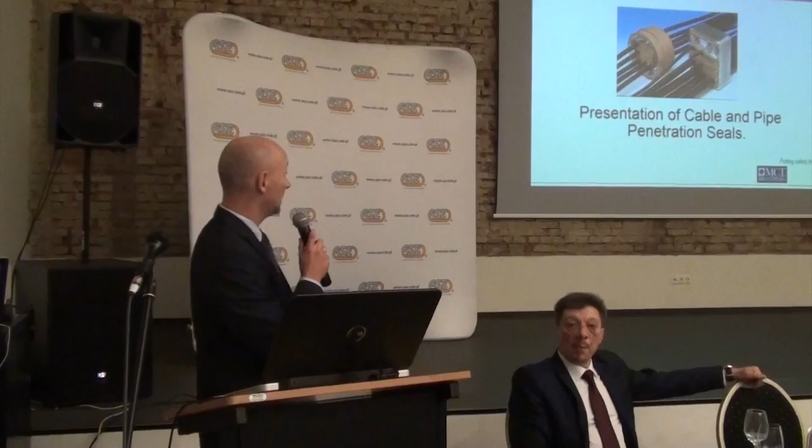My presentation is divided into three different groups of products. The first group is modular cable transit systems, MCT Brattberg. The second one will be marine external lighting from Tranberg company from Norway. And the third part is special GRP enclosures for very sensitive field instrumentation to protect against the harsh environment. So let's start from the beginning.

MCT Brattberg, the presentation of cable and pipe penetration seals. I would like to show you what the system is, how it works, etc. A few sentences about the history. This nice man is Nils Brattberg, the founder of the system. He was a naval architect in Karlskrona naval shipyard in Sweden. And he saw the need to seal the cables and pipes on the ships, and he found the special system.

After he died, the company changed its name from Likab to MCT Brattberg, after him. The company is based in Lyckeby near Karlskrona in Sweden. Founded in 1759, it's more than 250 years old. In the beginning, they produced copper hammers, but from 1860 they manufactured nails. 60 years ago, they received a royal charter to manufacture cable transit systems. Now it is a world leader in cable penetration systems.

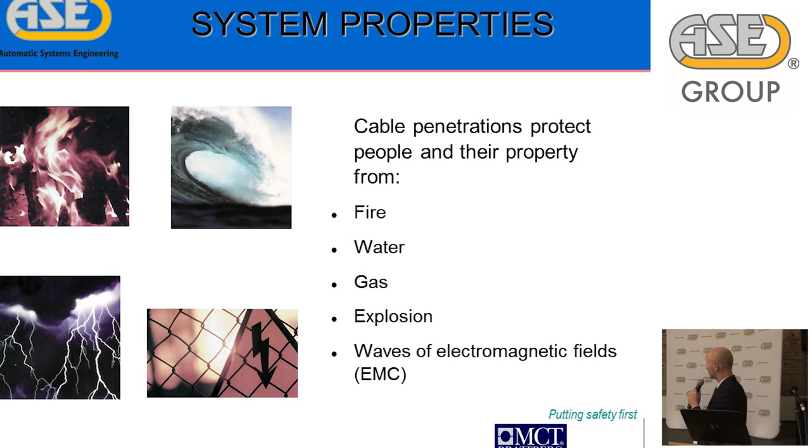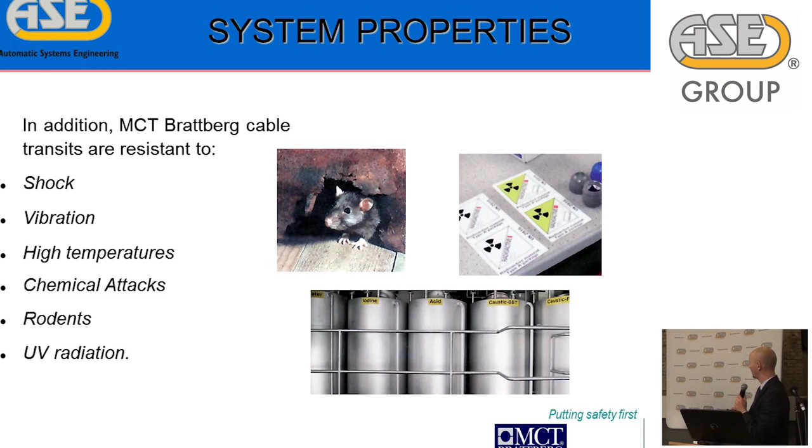Additionally, our customers need our system because they want to protect the cable transit against shock, vibration, high temperatures, chemical attacks, rodents, UV radiation. It's also a funny story, because our system has special approvals that it is not so tasty for rats. This is very important especially in harbor and also land applications, big plants where rodents are present. Of course, today's seminar is devoted to Ex zones, so our system also fulfills these requirements: ATEX for zone 1 for gas and dust.

How the cable transit works. It's a very simple idea. We have to install the frame into the structure. We could weld it to the structure, we can bolt it. It doesn't matter where we are. It could be a brick wall like this, or it could be the bulkhead in the vessel. We have a special solution for each place, and we pull the cable through the openings, open the frame, adjust the block to the cable, insert the block, and fill free spaces.

We fill them with special blocks, meaning zero blocks or spare blocks, and we put special stay plates between the rows of the modules to anchor the rubber into the frame, put the compression system on top and tighten the screw, and we have all the properties like fire, water and gas tightness up to 5 bars thanks to these systems.

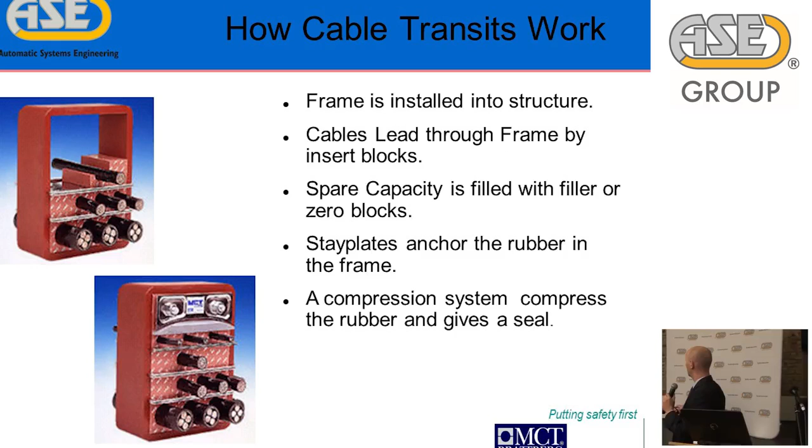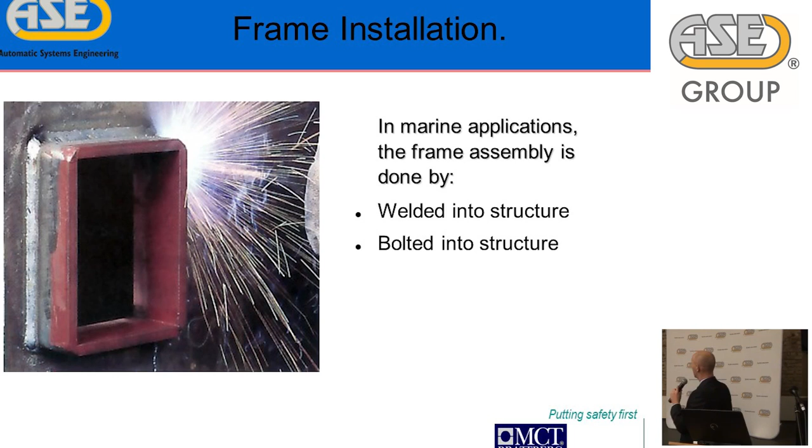So in the beginning I would like to show you some frames for marine applications, because the system started in marine 60 years ago, and I will start from this segment. The standard frame is very easy. It's a marine frame welded or bolted to the structure. The name is RGS. This is the standard frame, on the left side. We use it in places where welding is allowed.

The second frame is RGSO, the open-ended version. It's used when we have cables already put through the cable transit, so we have to use the open version of the frame. And the third picture shows round corner frames. These are special frames for welding in place, to reduce the risk of cracking.

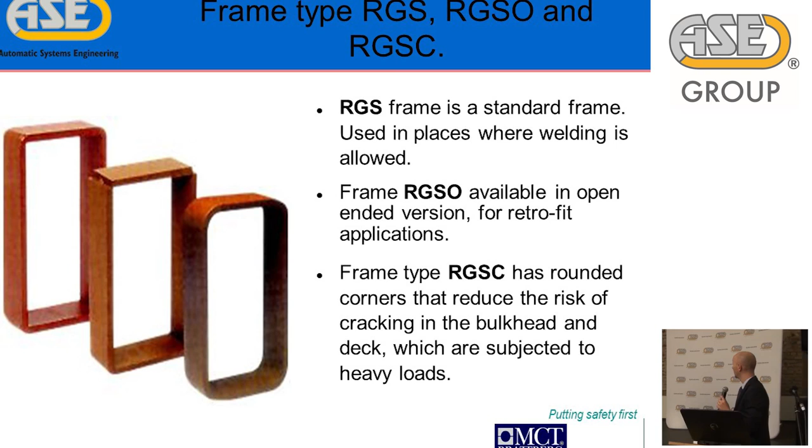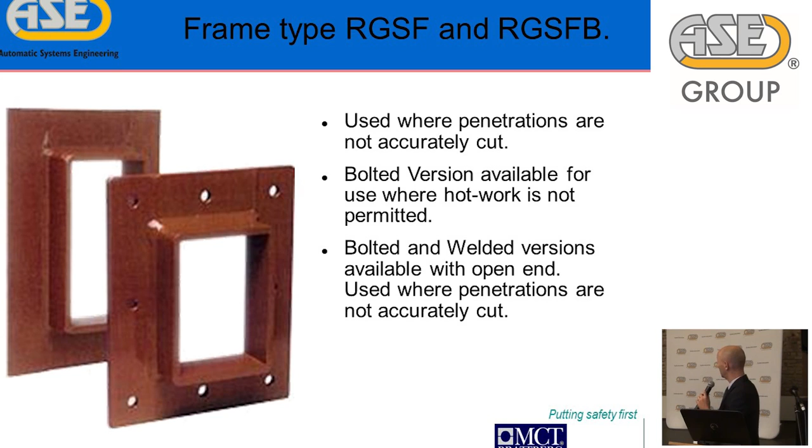Next frames are the RGSF and RGSFB. F means the flange, and B is bolted, flange with the bolted. So it's very easy to know the short name. We use this frame when we have not accurately cut the openings in the bulkhead on the ships. Of course, there's also a bolted version where there is no possibility to weld. Both of these frames could be in an open version also.

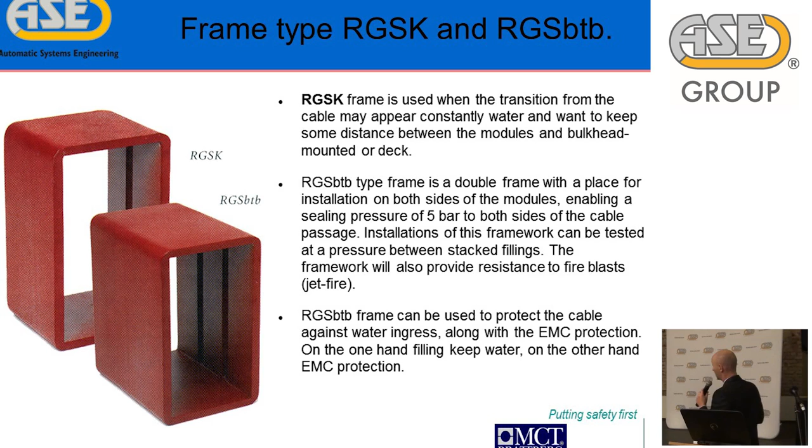The second picture is a special frame, RGSbtb. It is mostly used in offshore applications, and we can use it on both sides. For example, on the left side we can use the standard blocks for fire class applications, but on this side we can use EMC protection. So, an excellent application frame.

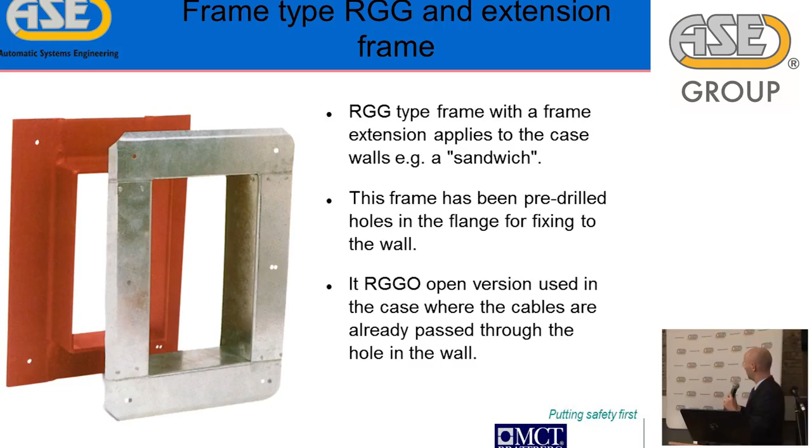The next frame is RGG with an extension frame, especially for a container. It means sandwich. It looks like a sandwich: a very thin sheet of steel, some insulation inside, and the last part is also a sheet of steel. We use this kind of frame. It has pre-drilled holes, a flange, and we can put it on the container, for example.

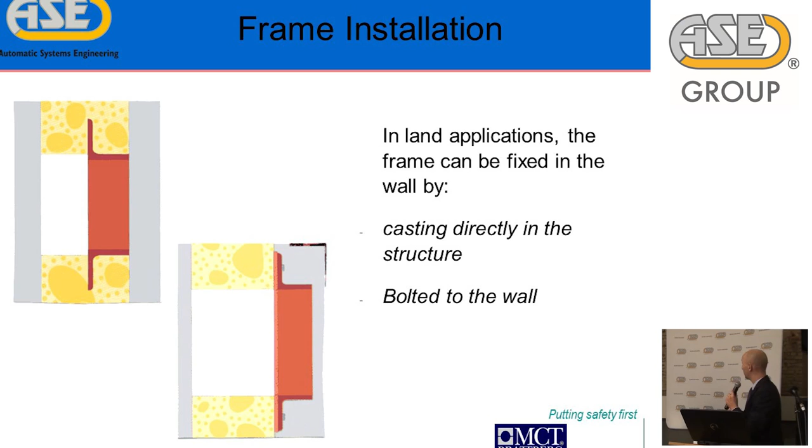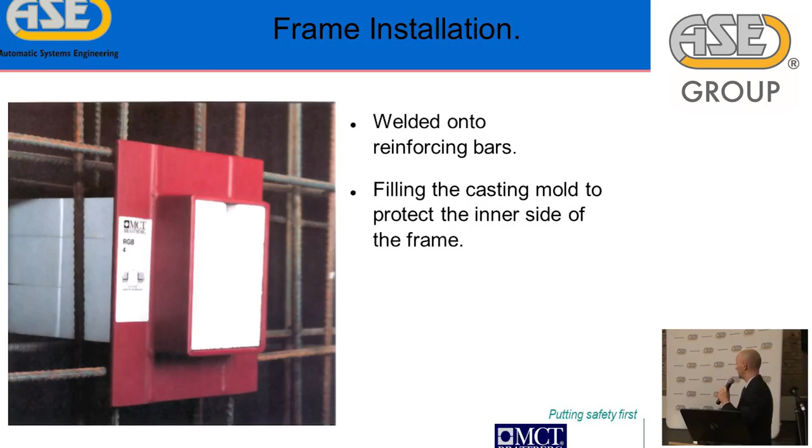How to install the frame in the building area: of course we can cast it directly in the structure or bolt it to the wall. So very easy. Or weld it onto reinforcing bars. But we have to remember that if we weld, you have to fill a special casting mold inside the frame, because there could be some dirt inside after the welding. This is installation in the sandwich construction, as mentioned before. It's very easy, and we use an additional seal between the flange of the frame and the wall.

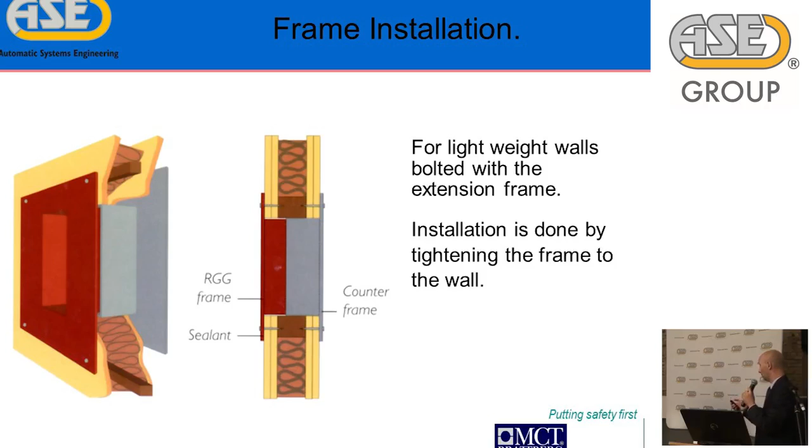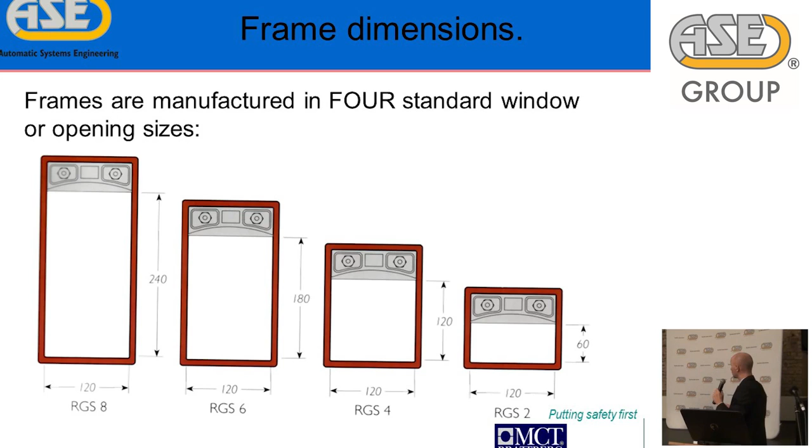Our system was the first in the world, and Niels Brattberg found 4 standard sizes. From the right side, it's RGS 2, 4, 6, and 8. The width is the same, 120 millimeters inside, but there is a difference in the height. Of course, it doesn't matter how many cables there are. It could be 300 different types of cables. We can adapt the frames to the quantity of the cables and their external diameter.

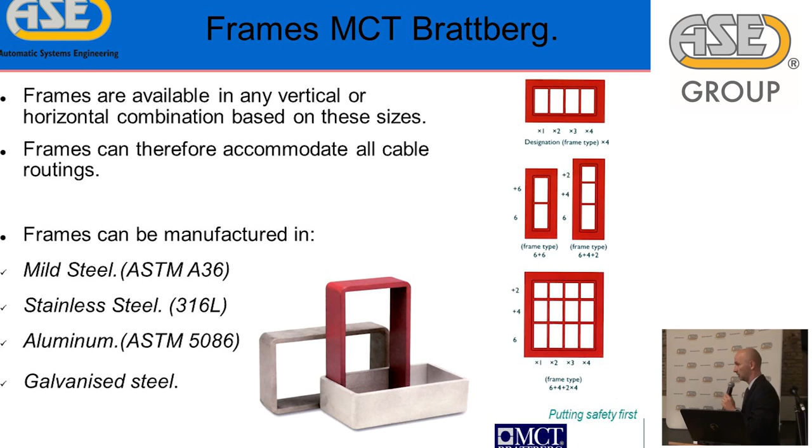Of course, it depends on your application. We can use frames made from stainless steel, mild steel, aluminium, or galvanized. Galvanized steel is not recommended for welding because it will be burned. Most of the production of the frames is located in Karlskrona in Sweden and robotically welded. So we have perfect quality, excellent delivery times, and each frame is tested not only for dimensions but also the welding points.

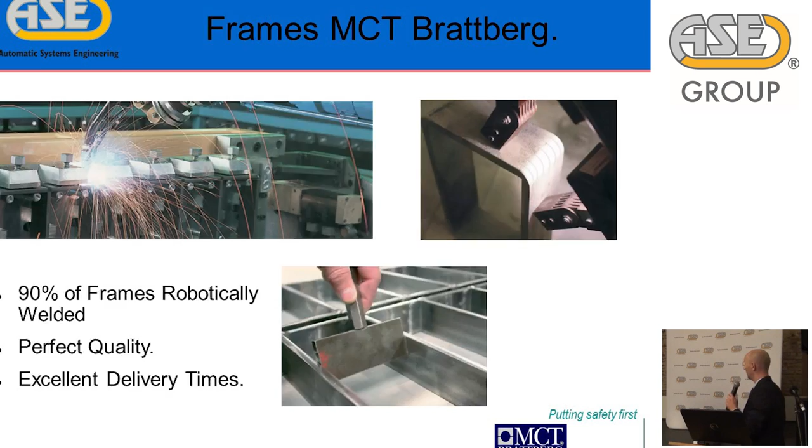Types of blocks, modules. In the system we have a few standard blocks. First of all, and for us the most interesting, we recommend using the standard blocks like this. I will show you later in the next slide how it looks. Flexible blocks, AddBlocks, U-blocks, and spare blocks for free space.

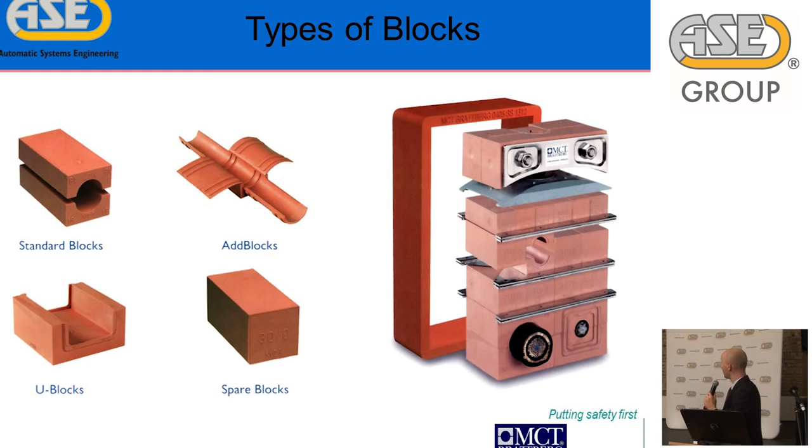Standard blocks. Standard blocks consist of 2 halves, suitable for outer diameters from 3.5 to 101.5 millimeters. It's important that all the rubber products are pre-lubricated. It means you don't have to think about special lubrication. Zero blocks, meaning spare blocks, we use when we want some free space in the frame for future additional cables.

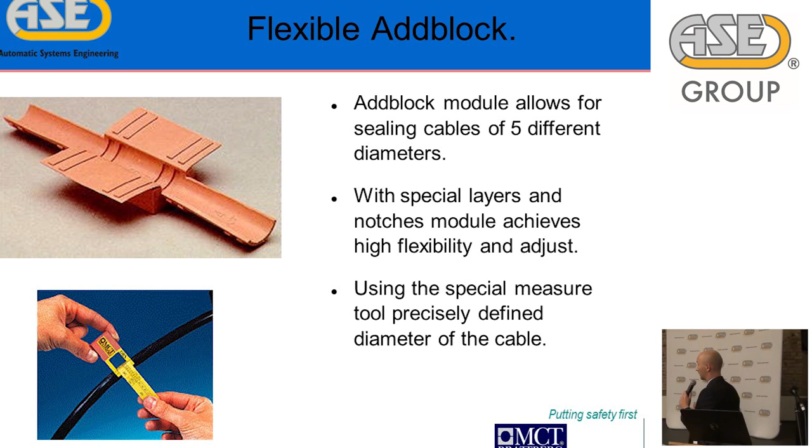Flexible AddBlocks. We call them service blocks. They are very good if you have no idea what type of cables will be in your application, on ships or in the field. So we can take these flexible blocks. It has a 5 millimeter tolerance. You don't bother what cables will come. This block has special external layers like this, and you can adjust after measuring the cable. You choose the proper layers. These layers have different widths, and there is also information on the blocks about which external cable diameters to use.

So how it works: after measuring the cable, you select the appropriate layers. So you put them inside the blocks. The rest of the layers is separated from the blocks, and the same way you do with the other half of the blocks.

Some features about the rubbers, about the modules. Modules are rubber components made by injection molding. It's a halogen-free material, low rate of smoke during a fire. This is the most important thing on a ship: to protect the people not against the fire, but against the smoke. The smoke kills first, then the fire. The rubber parts are pre-greased, pre-lubricated, so it's a very, very clean job to do with our system, and very simple and fast.

AddBlocks enable adjustment to the cable diameter directly during installation. This is, as you mentioned, a service block. It means that if you travel 500 kilometers to some application and you have no idea what cables there are, you can take the flexible block. But if you have ships in the shipyard, located here, it's much easier, much faster and cheaper to use the standard blocks.

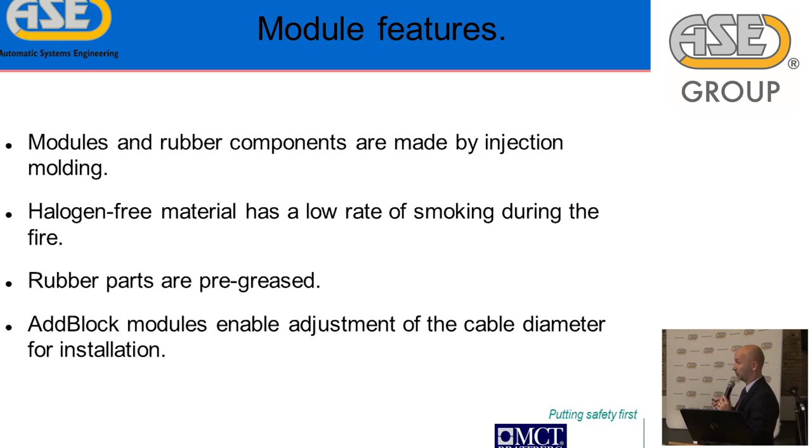Of course, between all the rows of the blocks we use stay plates, which help us to anchor the blocks into the frame, and also protect against an explosion and high pressure.

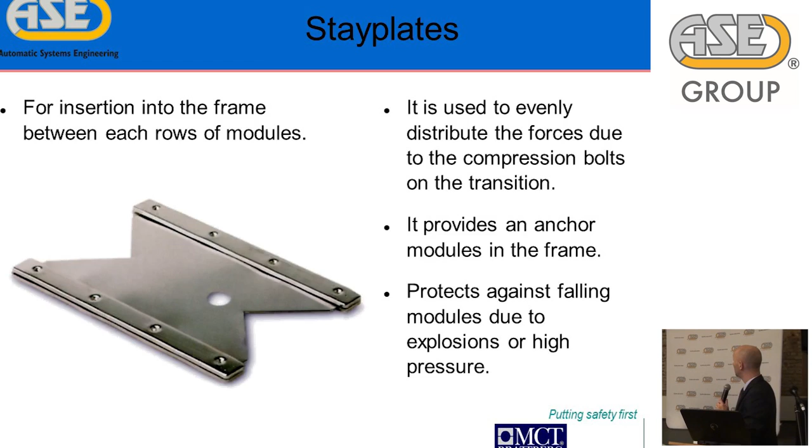We have two different systems for compression. The first is made from two parts: end packing STG1 and compression plate. So it's very easy to do. At the beginning you put the compression plate, tighten the screw, and you have a complete seal, and then you put on the top of the frame STG1, a compression unit, and you fill and seal only the top part of the frame.

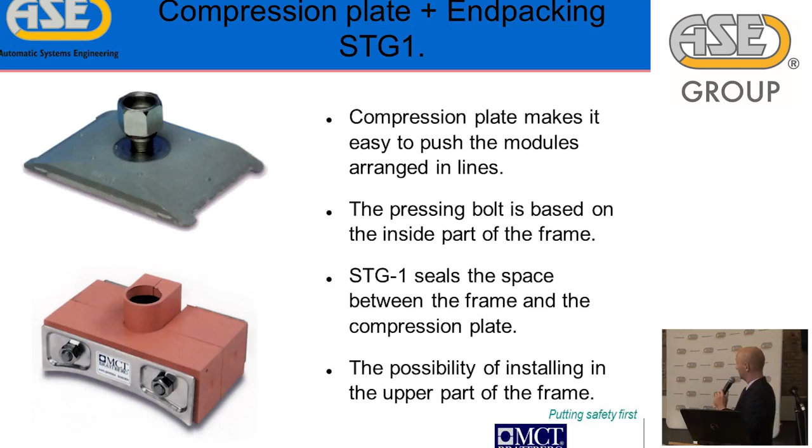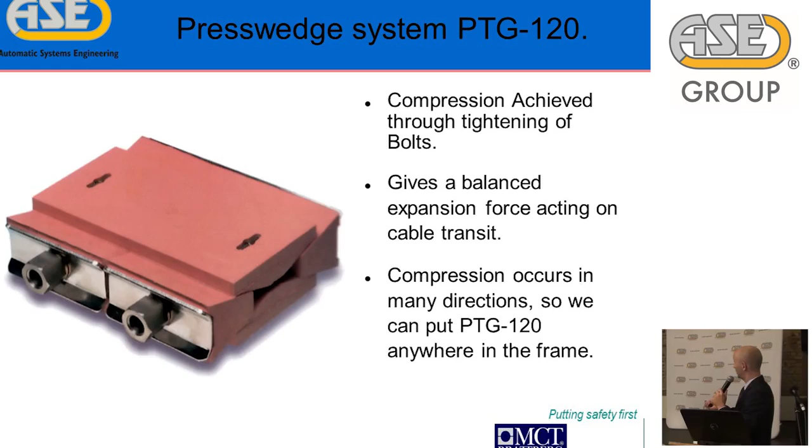The second system is a PTG 120. It's very simple, and you can use it anywhere in the frame, not only the top, in the middle, wherever the cables come to the cable transit. It's very simple. You need only one key to tighten the screw, and this part comes together, and that's why we have compression. Very simple.

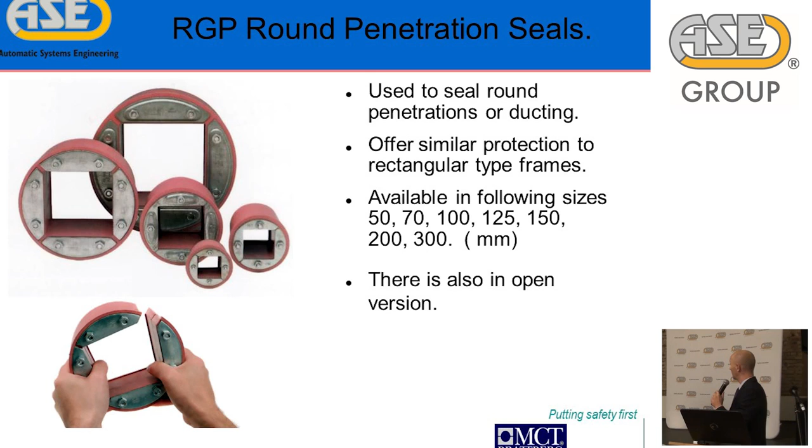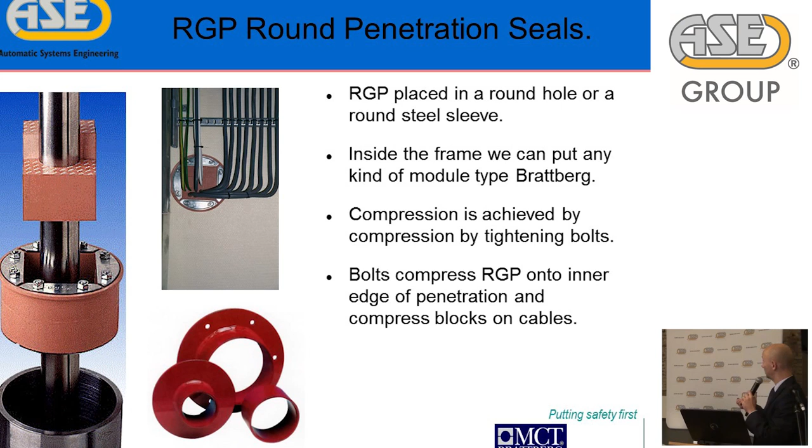How to install? It's very, very simple. You have to have the round sleeve welded into the structure or bolted to the wall. You put the RGP frame, put the pipe or cables, and fill in the blocks. And tighten the screw on the outside part of the frame. That's all.

Especially for the marine market, the frame AS-R is dedicated for single cables. And of course, Lloyd's certification for fire class A60, tested under pressure to 5 bars, made from stainless steel. This is for single cables and with a big tolerance. For example, the smallest one is for cables from 4 to 12 millimeters external diameter.

Mainly for land applications, the cable gland AMES-R is also a flexible system, but it could be used also in the marine market instead of plastic enclosure bodies for this cable gland. When we use the metal housing, we have the certificate for fire class. It's tested up to 15 bars of pressure. So it's a kind of cable gland, but also certified for fire class and pressure.

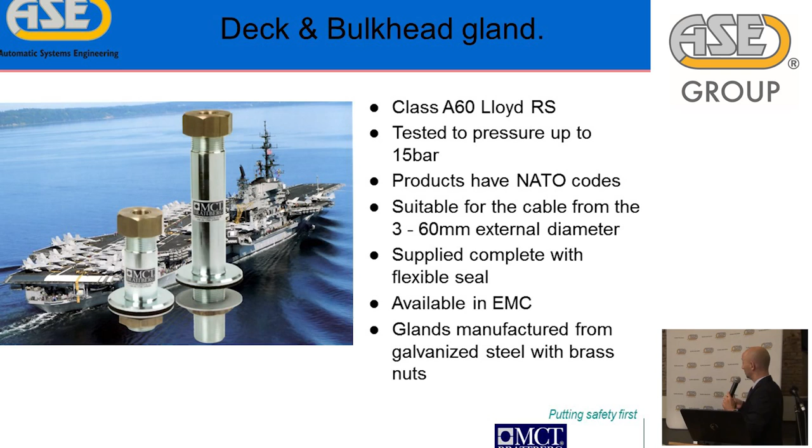Deck and bulkhead gland is the next product, very popular for NATO because the product has NATO codes. It is also certified for fire class A60, up to 15 bars of pressure. And we use these cable glands when it's impossible to do hot works on the ships. For example, welding is not allowed. So you can screw the cable glands into the deck or bulkhead.

If we have some switchboards and we have to seal preterminated cables, you cannot use standard cable glands because of the preterminated cables. So we can use this kind of cabinet seal made from aluminium and rubber, and it's a perfect solution instead of standard cable glands. And we screw it to the enclosures directly. So we don't have a fire class, but IP66, 67.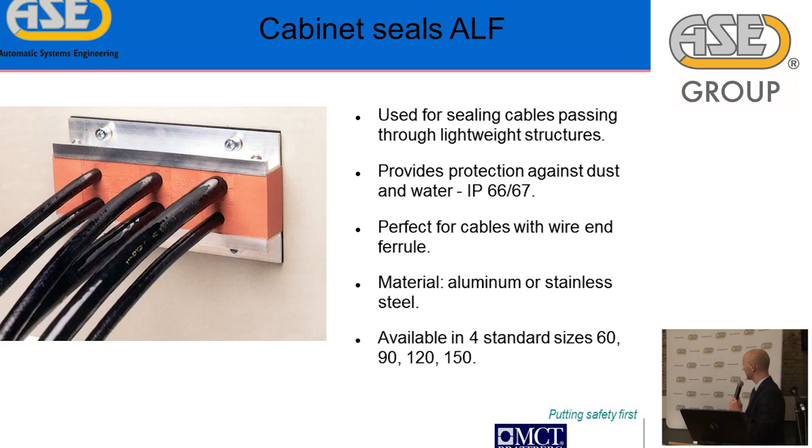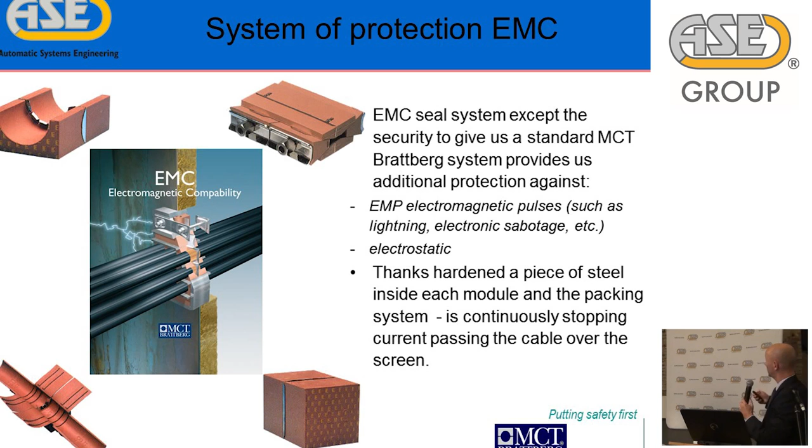Next product. This is a special product for electromagnetic compatibility, for the EMC. So it gives us additional security, additional protection against EMP, electromagnetic pulses, such as lightning, electronic sabotage, and electrostatic. So each block has a special thin shape, thin steel, like here, and you have to take off the insulation from the cables in this part, and the screen of the cable touches this metal sheet, and you have a special grounding.

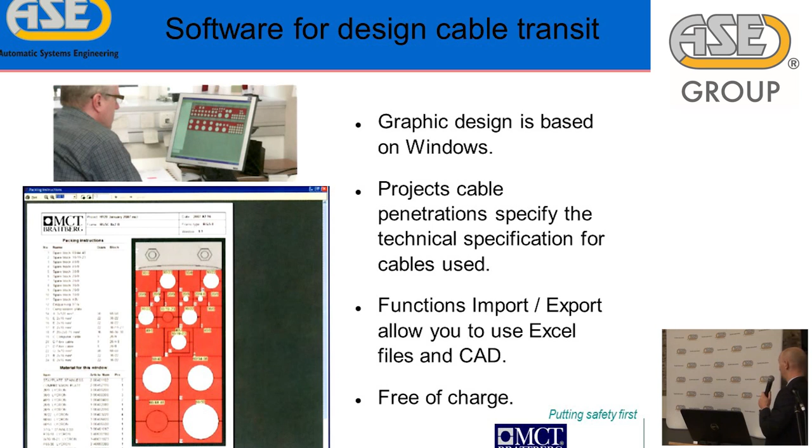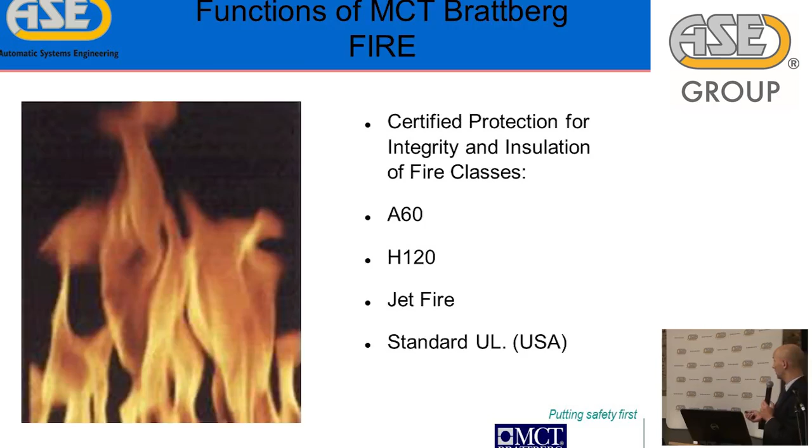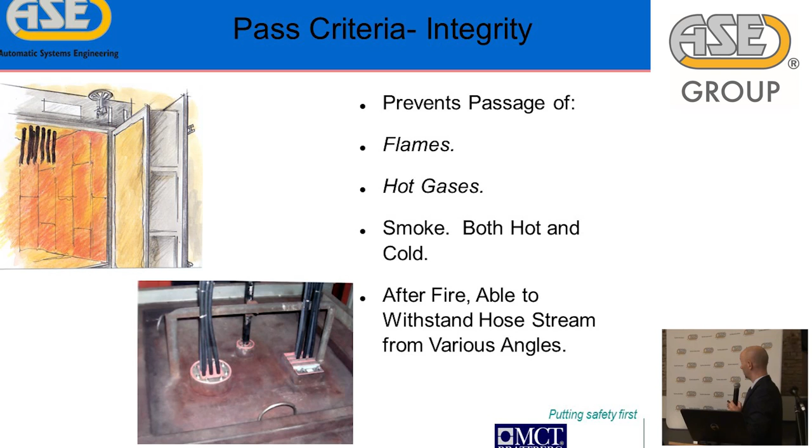So functions of the MCT Brattberg: as you mentioned, it is a fire class for special protection for integrity and insulation. A60 is a marine fire class. H120 is hydrocarbon, for the offshore industry. Jet fire and American standard as well. We pass criteria for integrity: prevent passage of flames, hot gases, smoke, both hot and cold. And it's important that after the fire, it is able to withstand hose stream from various angles. So this is the integrity criteria.

So it looks like this after the fire. For example, this is the fire side, and this is the other side. The cable is not damaged, but after the fire, it's totally damaged. During high temperature, the cable insulation is burned. That's important. And the blocks are not standard rubber, it's a special rubber. This rubber fills the gap created after burning the insulation by expanding the blocks, the modules. So the cable transit stops the fire before charring modules. Tests demonstrate the stability of the transit even in the fire.

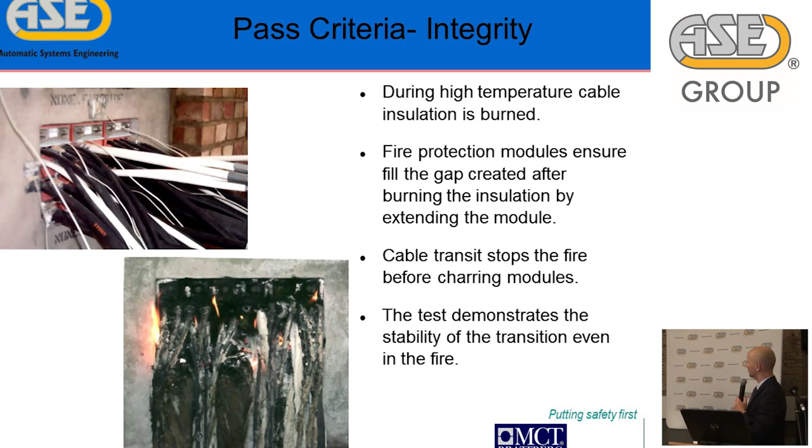Next criteria is insulation. It means we are talking about temperature. According to the norms, there will be no passage of heat more than 180 degrees on the safe side. This is measured by thermocouples, but of course now it's measured by thermovision. And in our test, we also measure metal parts like the stay plate, the screws, and all parts have no more than 140 degrees Celsius. Also included in the measurement are the cable cores.

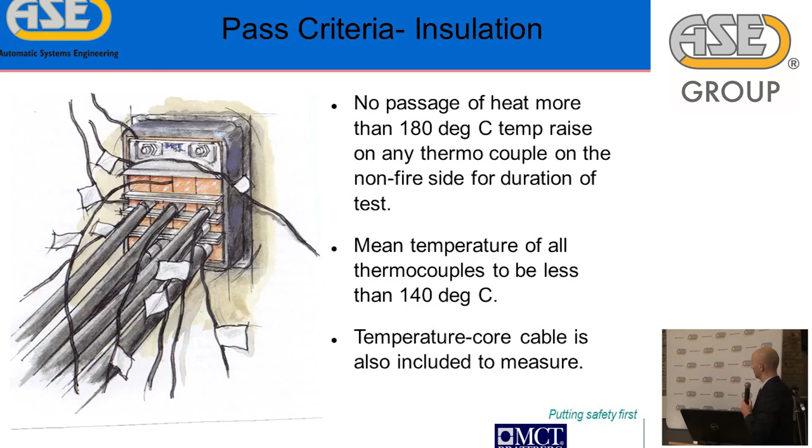It's strange, but there's no passage of heat. During the 1 hour of the fire, it's more than 900 degrees. So this is a very small temperature after 1 hour. There is a test for jet fire, also 60 minutes with pressure. Pressure tight application tested to 5 bar, hydrostatic and pneumatic. Explosion and blast testing is also tested.

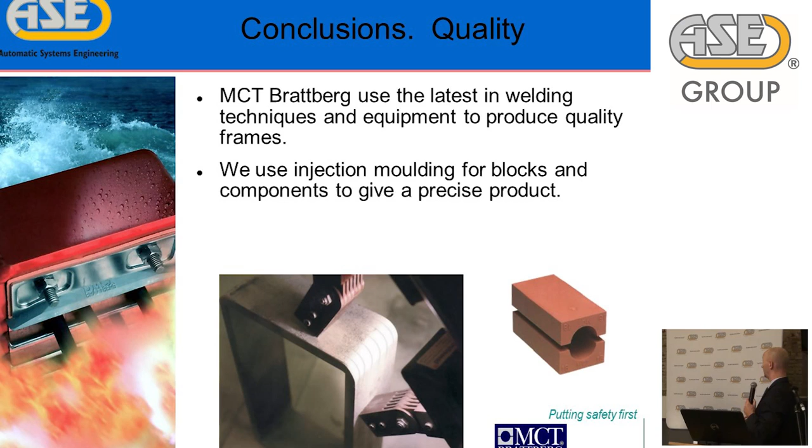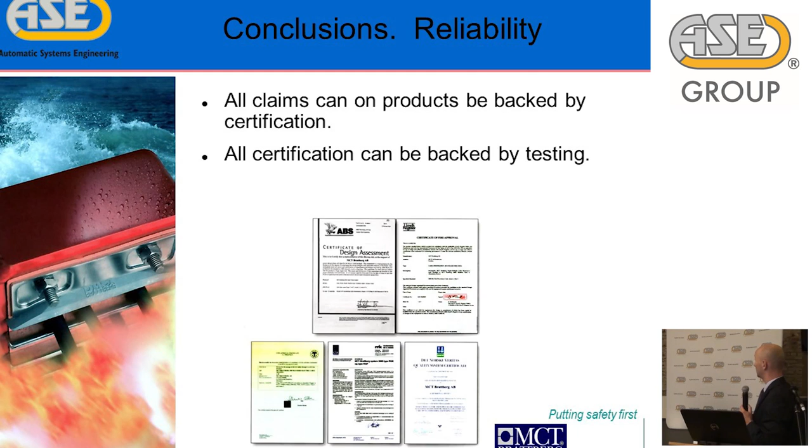So now I will present on a few slides external marine lighting from the Norwegian company Tranberg. Tranberg is part of the Stahl Group, it has belonged to the Stahl Group for 6 or 7 years, I don't remember precisely. They are focused only on marine lighting. So it's complete external lighting packages for any kind of vessel. We deliver navigation lights and control panels, searchlights, floodlights, deck lighting, helideck lighting.

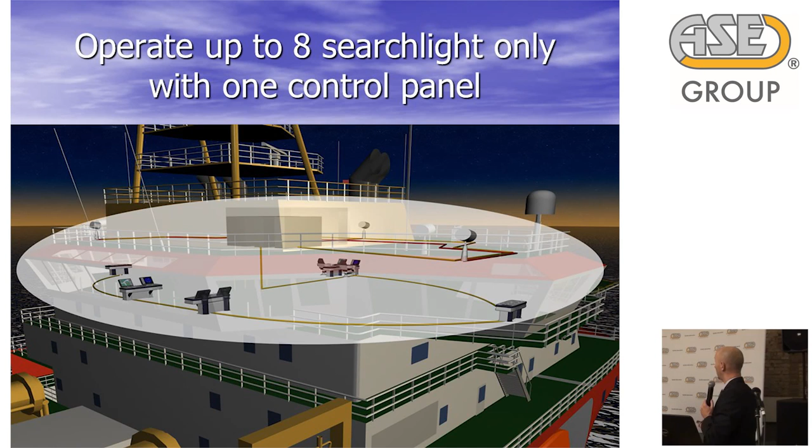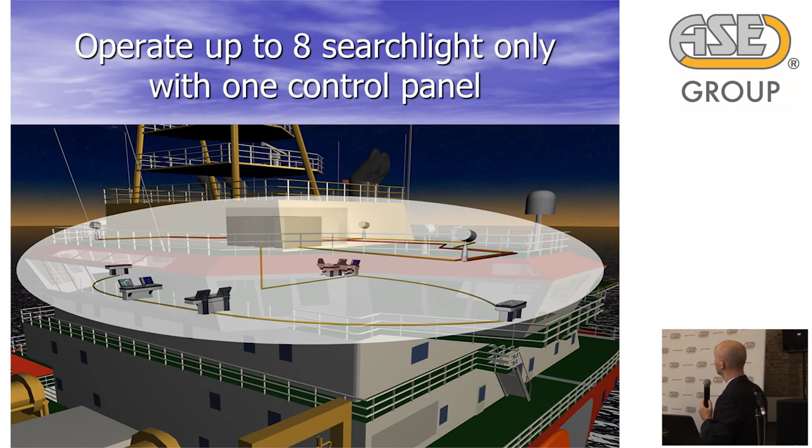Different power. It could be deck mounted, bridge operated, relay operated, bus operated, made of course from stainless steel. Simple installation. So via one control panel we can operate up to 8 different searchlights on the ships. So everything is connected via bus line. So it's very simple. Small dimension of the control panel, dedicated only for the searchlights.

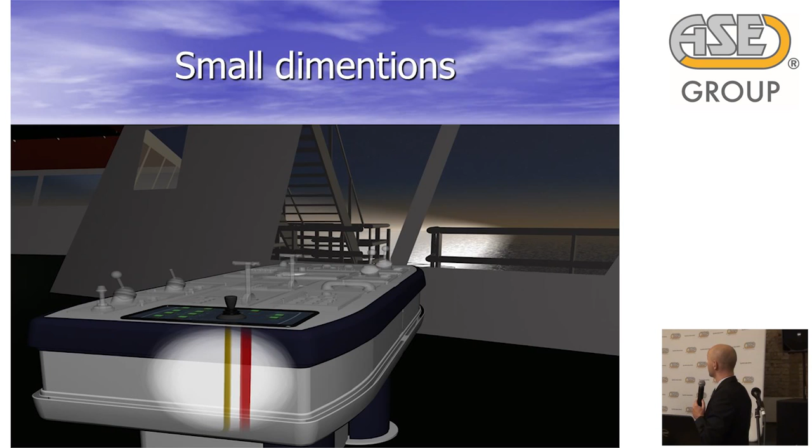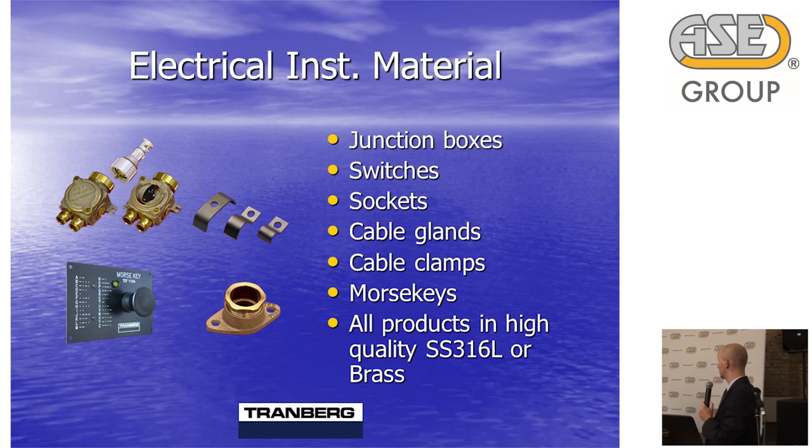Of course, we can deliver for the different areas, safe or hazardous, and of course for the different voltages also. Some electrical installation material like junction boxes, switches, sockets, cable glands, Morse keys, all products made from brass or stainless steel. Complete package. So if you have a project for vessels and you're looking for lights, you have to call us, Sergey, for the complete package of lighting. So it's very easy.

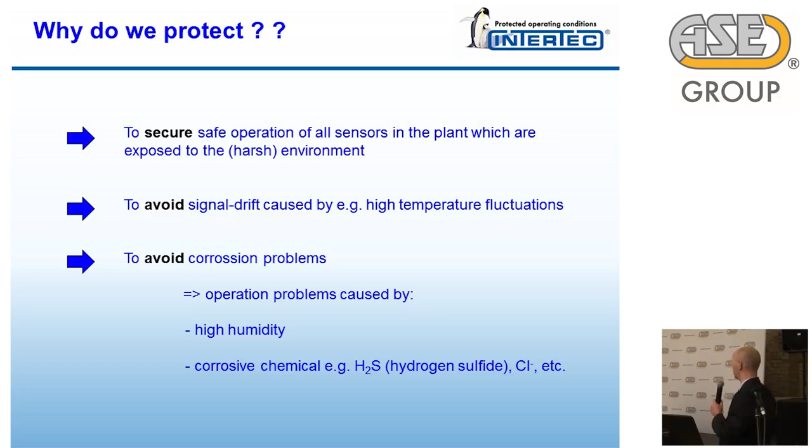Also, if you want to avoid signal drift because of high temperature fluctuation, to avoid corrosion problems due to high humidity, corrosive chemicals like hydrogen sulfide, chloride, etc. Or when we want to provide a reliable 4 to 20 milliamp signal from the process to the DCS, we're using this kind of shelter.

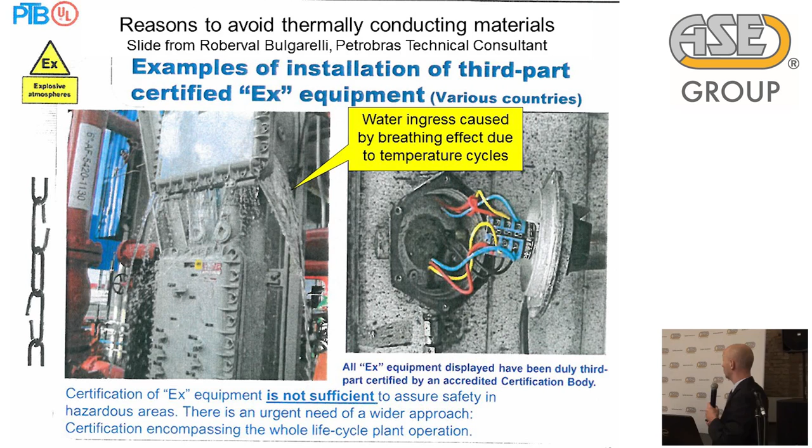Also the pictures. There is also water inside. Maybe there were no breathing glands in the enclosures. To avoid corrosion, you have to use the right material. So our product is made from GRP, glass fiber reinforced polyester.

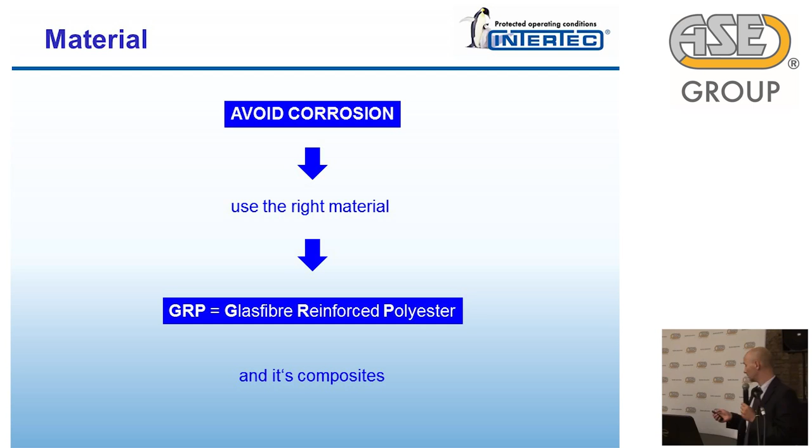It's composite, of course. And this is the sample from refinery Bayernoil after 40 years of use. So this looks like the new one. Of course, it's a little bit dirty after 40 years, but it looks okay. So it works after 40 years. No corrosion. We have here some enclosures with glass.

So also when we clean a little bit here, so everything is visible. The nameplate is visible and no corrosion, of course, because it's a composite.

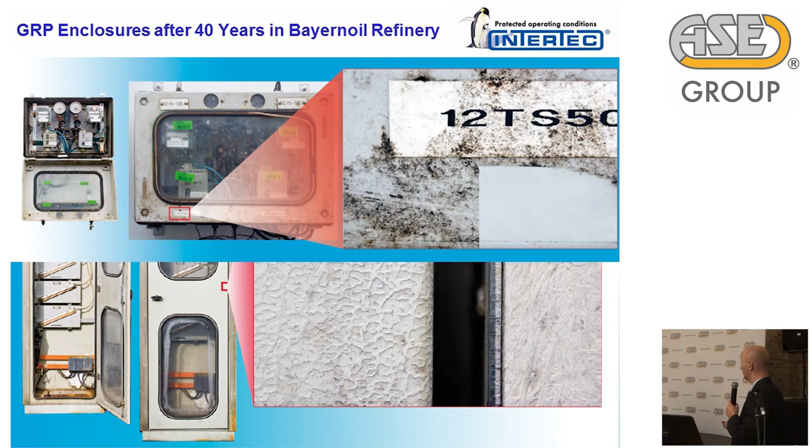So also there will be a few slides about the protection field instruments - how it could be done, and how it should be done. So first, how it could be done.

These are samples from our experience. But on the beginning, I'll show you on the slide information we receive when we have a special shelter protecting the instrumentation. We have air temperature, it's max plus 55 degrees, minimum minus 60 in the Arctic. On the surface, the temperature is also minus 60, but maximum it could be plus 80 degrees.

It's also the same temperature if we do not cover the instrumentation. If we put some roof only, we decrease only the maximum temperature from plus 80 to plus 55, because this is the air temperature.

Also it could be difficult, but if you put on some insulated shelter, inside it will be maximum plus 45 and minimum plus 10. So that's why, I know that some sensors and equipment on the nameplate have information that it's proper for minus 40 even, but I don't think so.

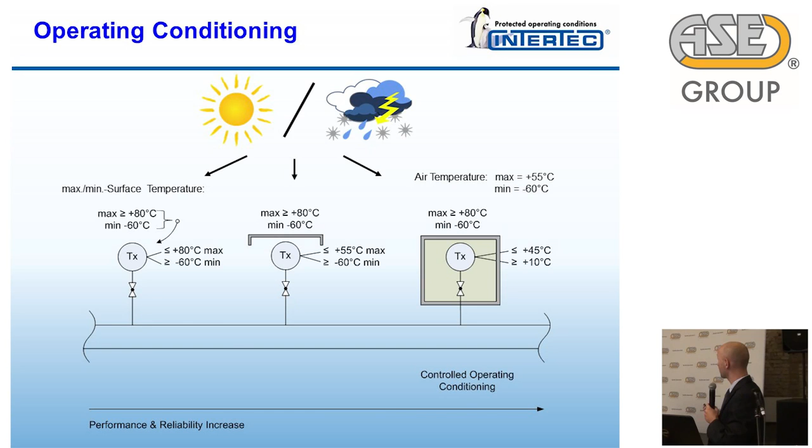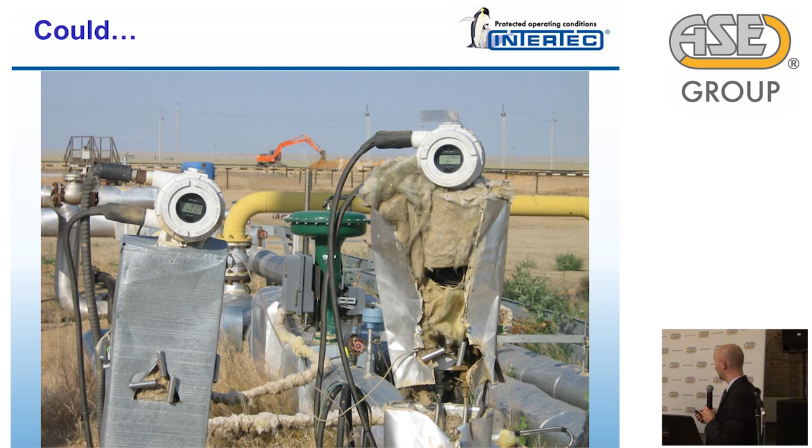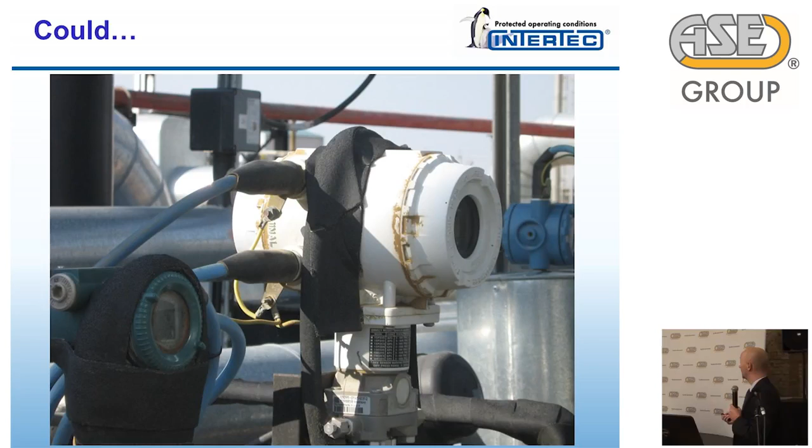So it could be done like this. Some customers want to insulate the instruments like this, like this - some tapes, I don't know why.

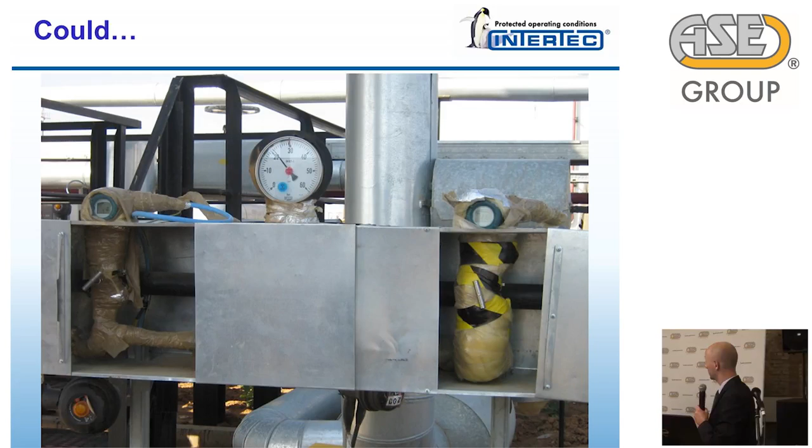Some steel shelters, but not insulated via foil, or some tapes - it doesn't work, sorry.

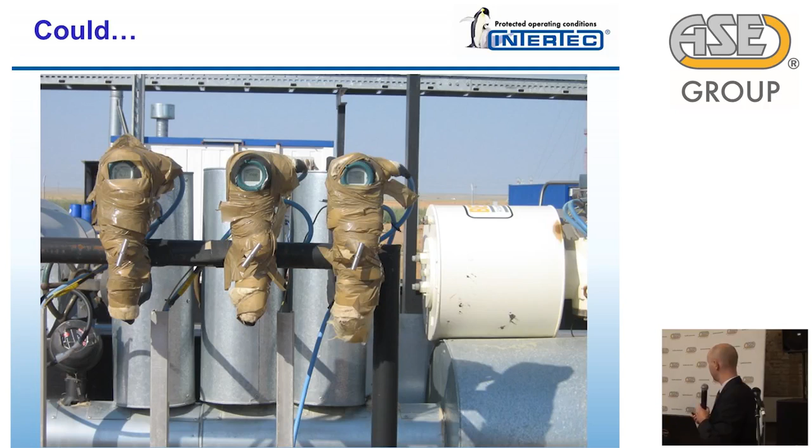Also in the Arctic temperature this is not correct. It also looks better, but still doesn't work.

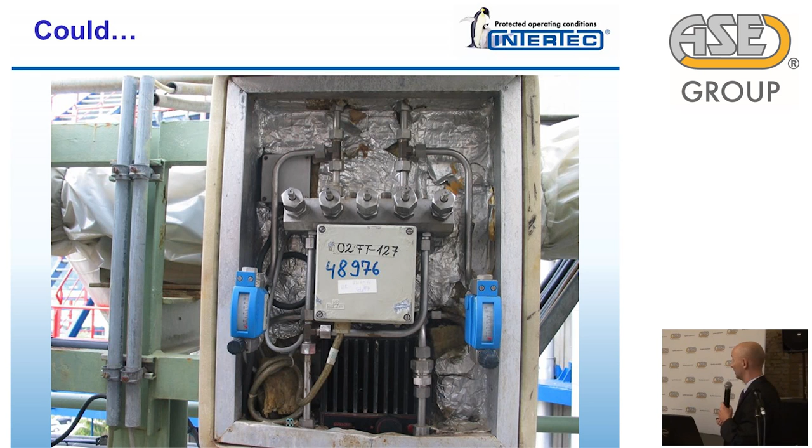Yeah, this is they try to insulate the shelter, but this is the heater here, some insulated foil inside, and also the steel shelter - they insulate outside, so it doesn't work. And it could be made like this.

So this is important, that on the first step of the project you have to think about it. It means that if you have some instruments on the field, you have to think about the air temperature outside and inside, of course.

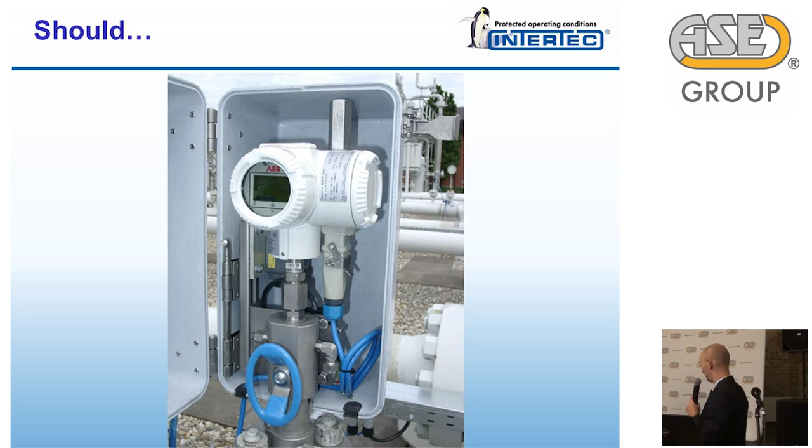For us, it's very easy when, on the beginning of the project, you send us information about the products which you want to use inside the shelters and the boxes - what type, what kind of producers, about the manifold, also some information - and we can very simply prepare proper enclosures, which are insulated properly and give normal temperature inside.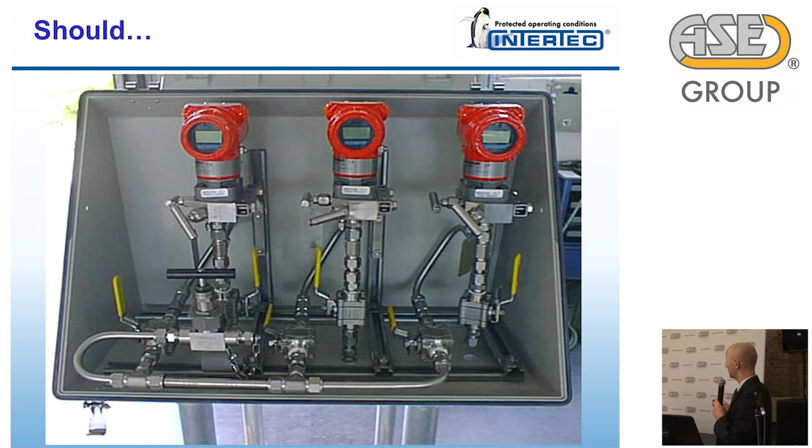It should be like this. Okay, but on the designing steps, this is information which the customer receives from us - there are drawings of the enclosures with your devices inside, and a list of the products which should be used.

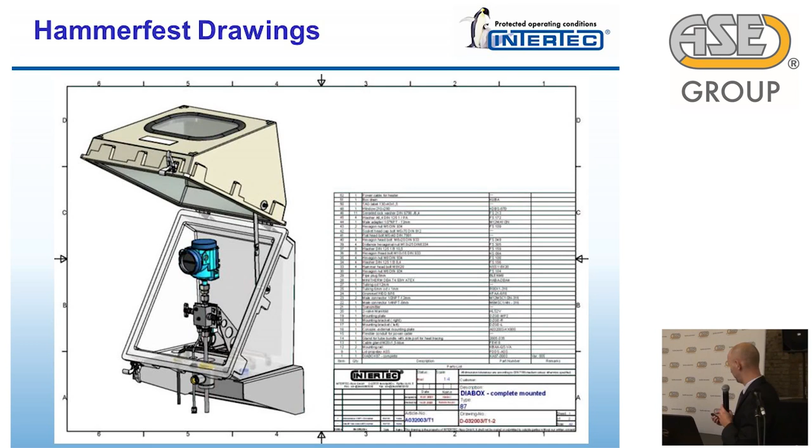This is also a few slides. And this is a DIABOX shelter like this one, the open roof.

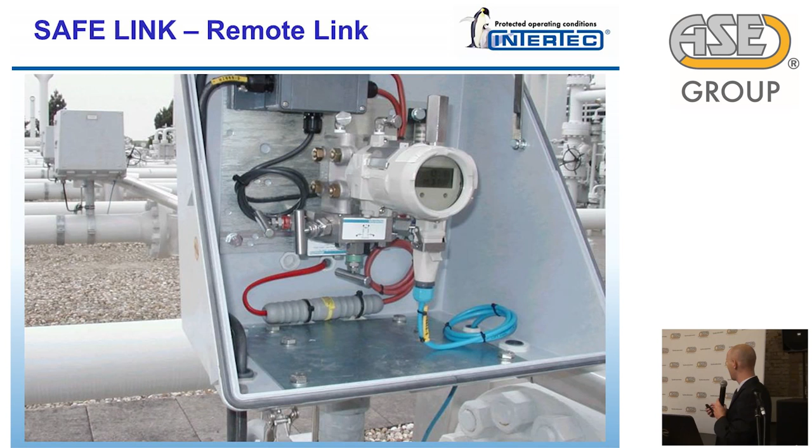Solution selling. No, I don't have time to see a crazy salesman. We have got a battle to fight.

So sometimes we keep our eyes closed for the new products, so we go in the standard way, but sometimes it's okay when we take something new - it's much easier.

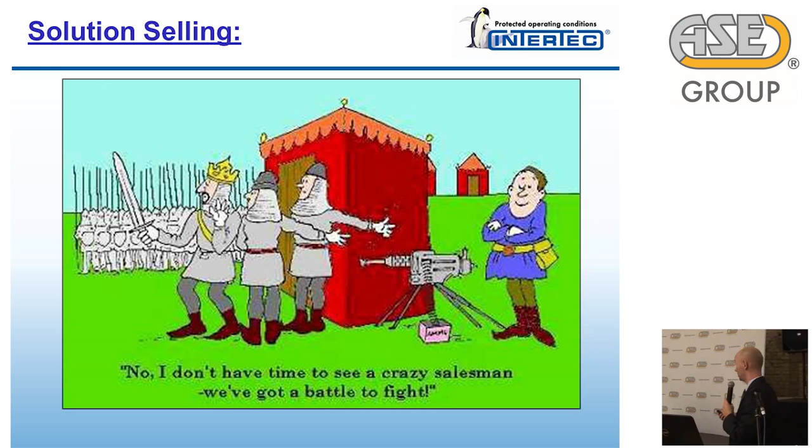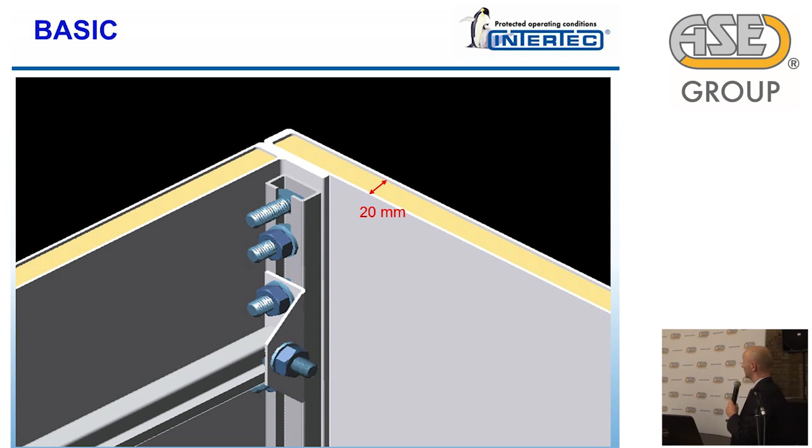So the heaters for explosion proof, of course, cabinet shelters. Of course, it was the small cabinets before, but now these are big shelters and containers for all kinds of applications. This is basic standard, it has insulation of 20 millimeters.

It looks like this. It could be together with the HVAC systems for desert applications. Just a few slides only and I'm finished, so don't worry.

This is also Sadara analyzer shelters. Some cabinets for the firefighting equipment of the offshore platform. And for Arctic environments, we have a shelter with bigger insulation inside.

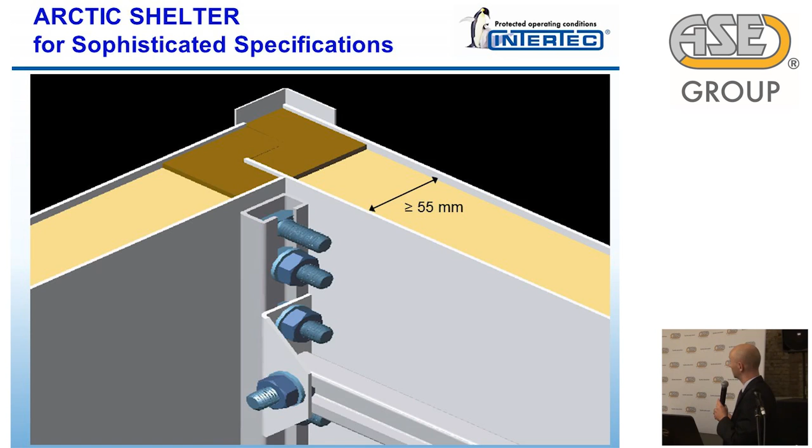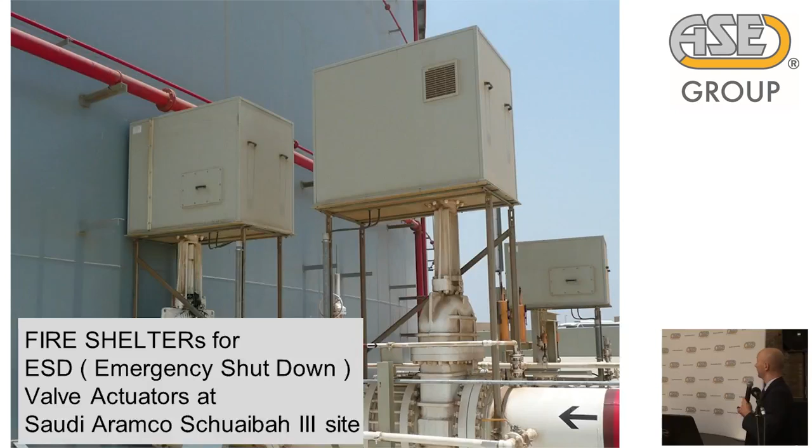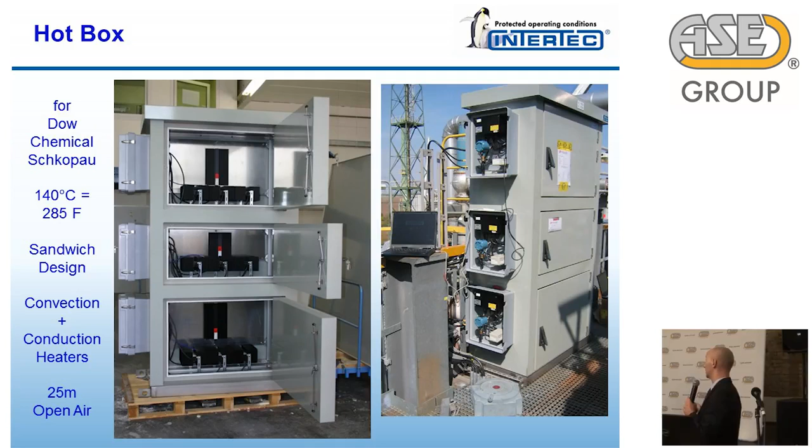And we have also a hot box if you want to keep a big temperature inside the box. So for desert application there is the HVAC - it means heating, ventilation and air conditioning in one product. HVAC is here.

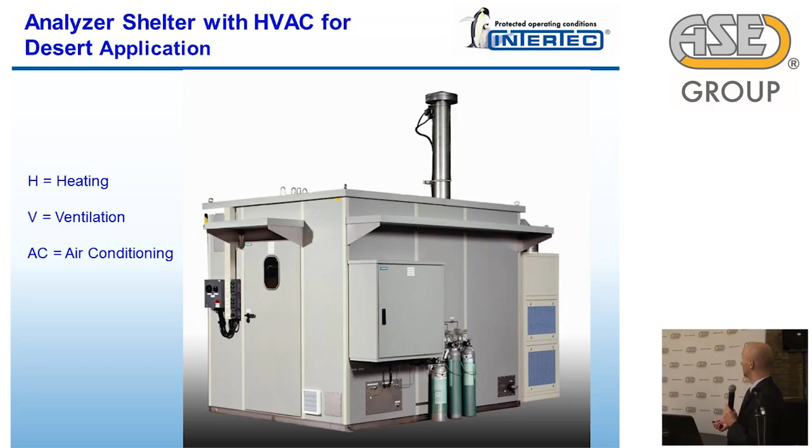So it's an air conditioner for the ATEX zone, approval for zone 1, separate inside/outside circuits, suitable for Ex p solution.